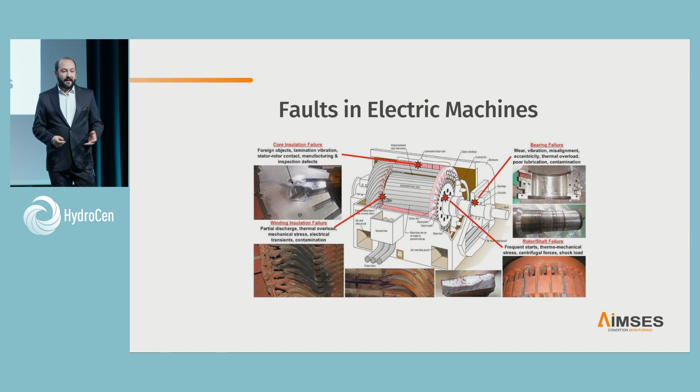About 14 billion electric machines are manufactured annually in the world, which means electric machines are everywhere, from energy production to oil and gas platforms and electric transportation systems. These electric machines are prone to various types of faults, from electric type of faults such as short circuit to mechanical like eccentricity, bearing fault, and so forth.

Sometimes these faults can be very costly. For instance, in a hydropower plant, unplanned stoppage due to the failure in a large one can cost up to 10 million NOK within 1 day. And for a toothpaste company, 1 day stoppage of the company can cost up to 10 to 11 million NOK.

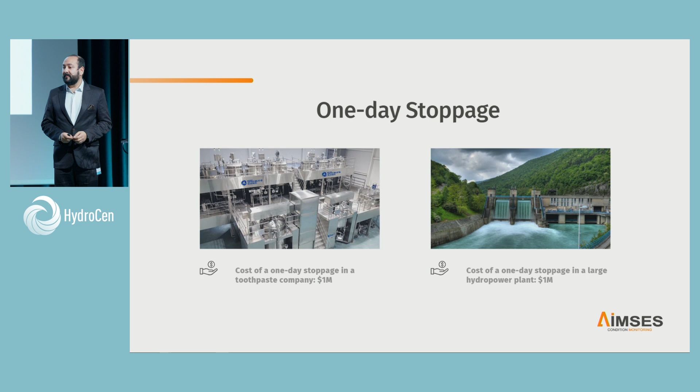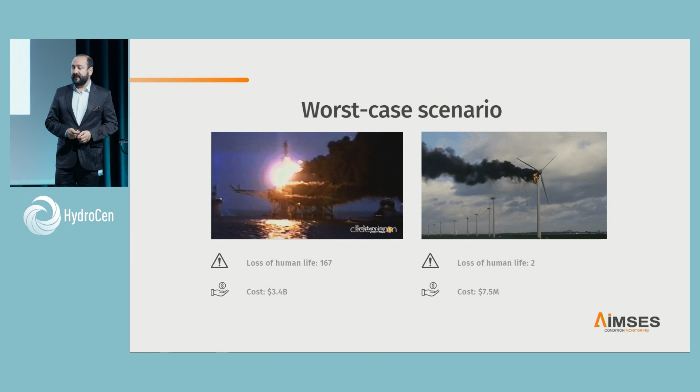But sometimes it can be even worse. In 1988, Piper Alpha, one of the world's largest oil and gas platforms in the North Sea, 167 crew members lost their life due to the failure in the motor pump, and it cost 34 billion NOK for the company. In 2013, in Netherlands, due to the failure in the generator, 2 young engineers lost their life.

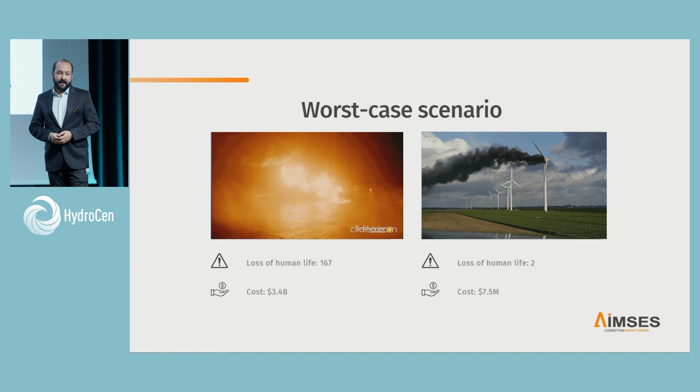And it cost 75 million NOK for the company.

For the past 10 years, I've been working on fault detection and condition monitoring of electrical machines. During this period, I wrote several papers. I wrote a book published by John Wiley in the US, and we believe we can provide a solution that can solve the industry's problem.

The available solutions for condition monitoring of electrical machines have common problems. Either they're using offline methods, which are very time consuming and not a favorite of industry. And if they're using online methods, either they're using invasive sensor technologies that require you to stop the machine and put the sensor inside, which is a no-go for many companies.

And for online solutions, such as vibration monitoring, you need to have a very severe fault in order to detect the failure. And even if these methods can tell you there is something wrong in an electric machine, they will not tell you which kind of fault you have, where is the location of the fault, and what is the severity of the fault, so the maintenance team can decide when to stop it.

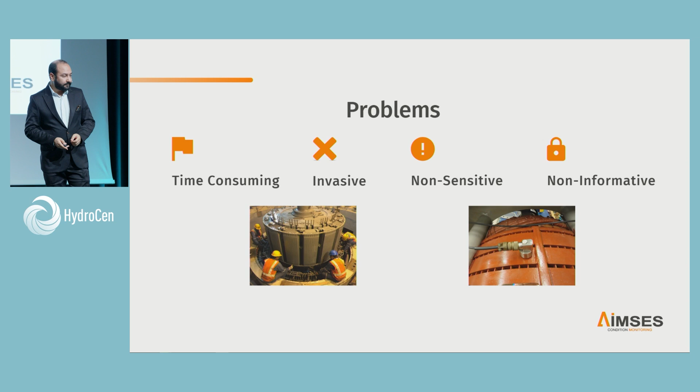We are providing a solution based on non-invasive sensor technology. We are measuring magnetic field outside the electric machine. We don't need to stop the electric machine. We can just simply go around and mount the sensor.

All the data from the machine, monitored 24/7, is transmitted into a cloud where all of our advanced signal processing and pattern recognition algorithms reside. And the output of this system is visualized either using AIMSES dashboard, or it can be integrated via API to third parties' condition monitoring system.

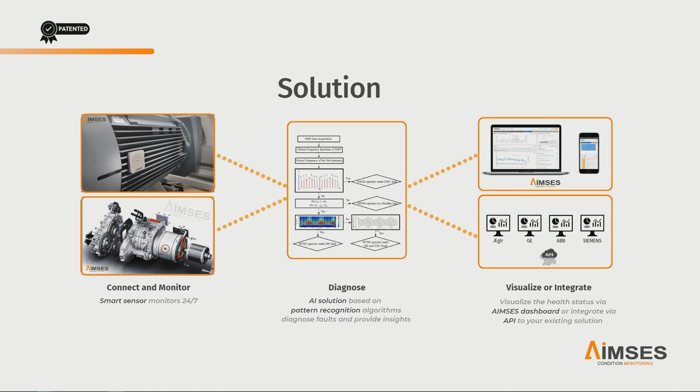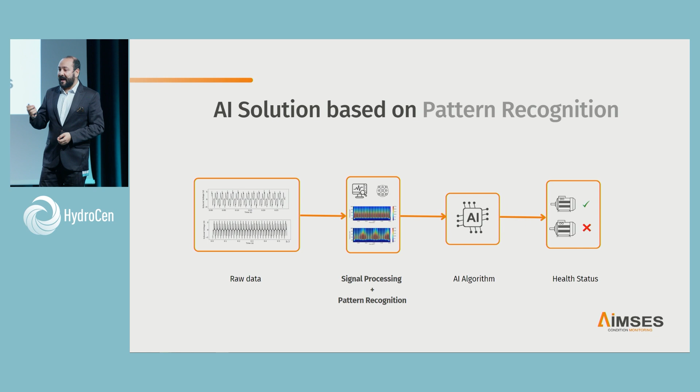Our solution is not just AI. We don't feed raw data and hope for some deviation in the data to raise the red flag that there is something wrong in an electric machine. We are doing feature engineering. We have a unique pattern for each type of fault.

By using our method, only for the hydropower plant, we can detect more than 10 different types of faults, from short circuit to misalignment to bearing defect and so forth.

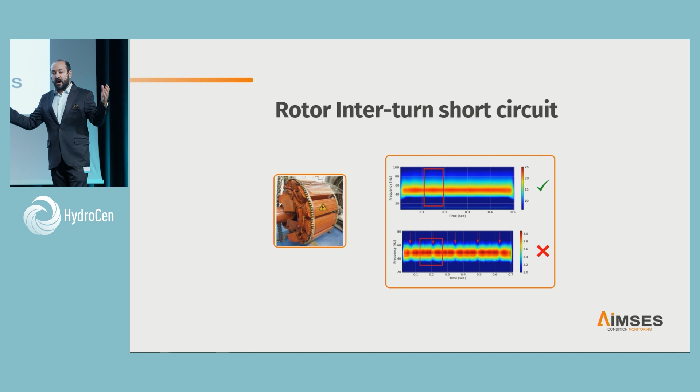What we are doing is using pattern recognition. If the machine is operating in a healthy condition, what you will see is the top pattern, a uniform pattern. By having a short circuit in the rotor field winding, you will see this notch in the pattern. Regardless of the power rating, if the machine is very small or very large, like 100 to 200 megawatts, the pattern will be the same.

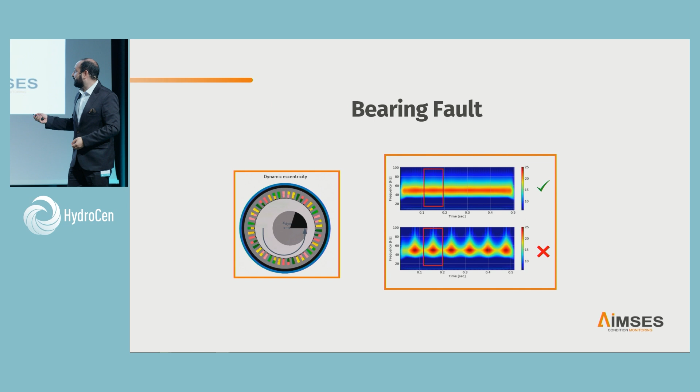If there is a bearing defect in the electric machine in the generator, then you will see this pattern. In case of having a static eccentricity - you know, majority of Norwegian hydropower plants are located inside the mountain - due to the rock mass movement, there is a static eccentricity fault.

By using just 4 sensors, we were able to detect with very high accuracy the location and the severity of the fault. We did one measurement with Hafslund Eco, and what we measured and calculated was around 14.8%. And another consulting company did the same, and their results were 14.5%. But the difference is, our method took only 1 hour, while for them it took 2 days to get the same result.

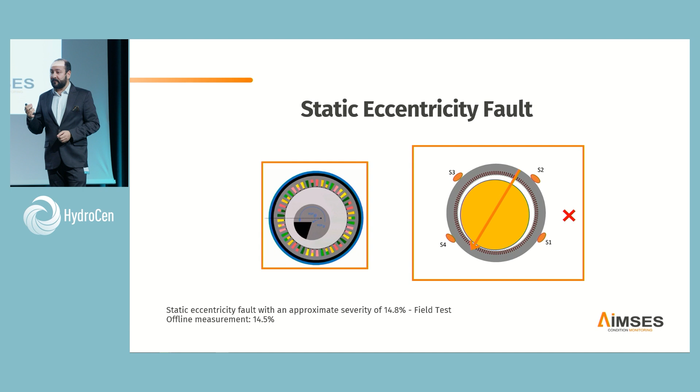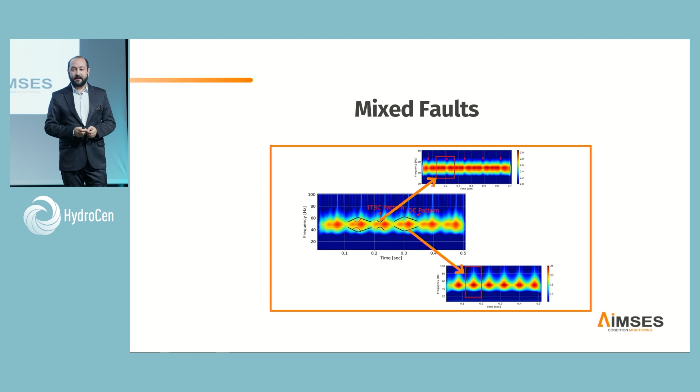And in case of having more than one type of fault, there is no go for available traditional methods to detect a fault. But we can even detect if there is more than 5 different types of fault at the same time in an electric machine - we can detect and discriminate each type of fault.

By using AIMSES, as I said, we can significantly decrease the inspection time from days to few seconds, which means we can reduce the cost. And at the same time, thanks to the high sensitivity of our system, we can prevent unexpected downtime for the companies.

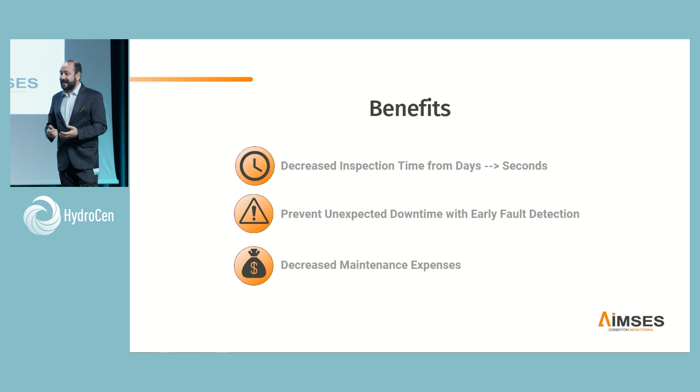So far, our work has started from 2018. We invested up to 30 million NOK in R&D activities. We have a strong IP. We have 1 granted patent, 1 pending, and 2 DOFIs submitted.

We had 7 successful tests with Statkraft and Hafslund Eco. And in summer this year, we had our first test with Aker BP in an oil and gas engine. And we are working towards having our first pilots with Sira-Kvina on Tonstad, Norway's largest hydropower plant. And there is significant interest from different companies, including Rolls-Royce, Infineon, Framo, Kongsberg, in utilizing AIMSES.